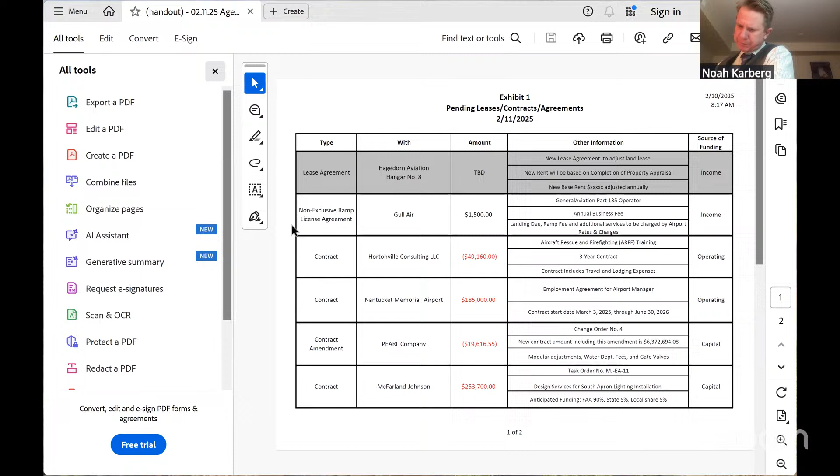I have change order number 4 with Pearl Construction for $19,616.55. There are 3 individual items on this change order. The first, $10,000, is the cost for the domestic fire and water suppression service connections for the dormitory building. It was a cost we had planned to pay directly to the water company via line item transfer. The contractor just went ahead and took care of this for us and is assessing it back to us as a pass-through cost. It's not marked up. So that's a $10,000 cost to them instead of from us to the water company.

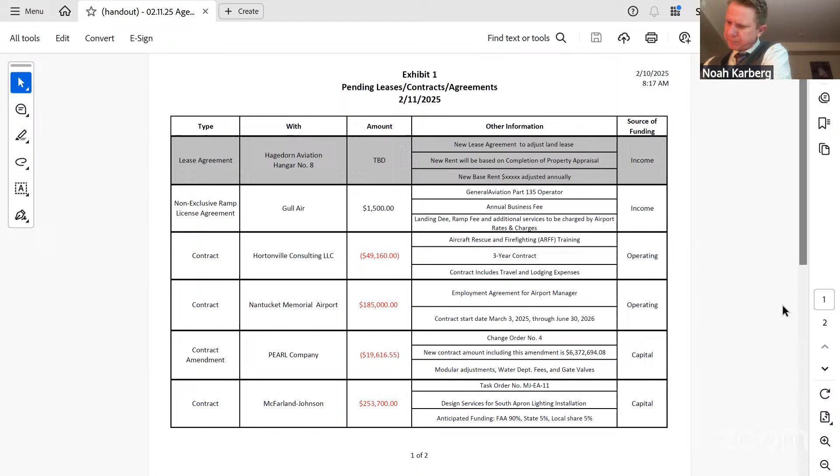Then $3,627.35 is to add future gate valves for any further development of the site, such as the future townhouse. It's well worth that to do that work now, in my opinion. And it was not in our original scope. And then the remaining amount is $5,989.20, and that's for adjustments we elected to the modular house. It's an increase in price for plumbing fixtures and additional electrical outlets.

I have 2 change orders, one with Industrial Protection Systems and one with Oshkosh. They're both related to the ARFF truck, but they're in 2 separate contracts because they're in 2 separate grants. The first, change order 1, IPS, is a credit of $1,469.25. It's due to the deletion of a ladder that was to be supplied, and it's a calendar day extension. The industry is just backed up in providing vehicles and equipment, so it's an inconsequential delay to us.

And then the second change order is for Oshkosh, a cost of $26,873. This cost includes the onboard foam proportioning system. It was not originally scoped with the truck when we first developed our scope. It was before the fluorine-free foams had passed mil spec. Subsequently, we elected to have the onboard foam proportioning system, and it has also become FAA eligible. So that will be available with typical AIP splits.

There's also an additional calendar day adjustment. Again, Oshkosh is doing a great job for us, but there was some delay in the line and with the contract. And then the final item is I have a task order with McFarland Johnson for ramp lighting for $253,700. Again, this is AIP eligible.

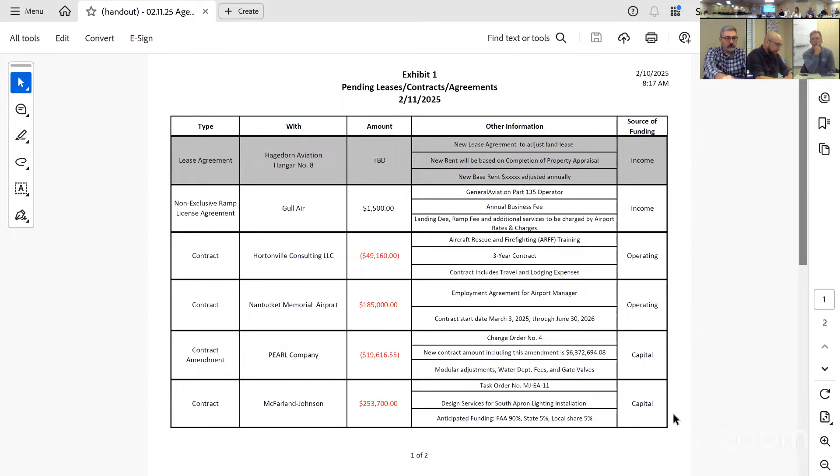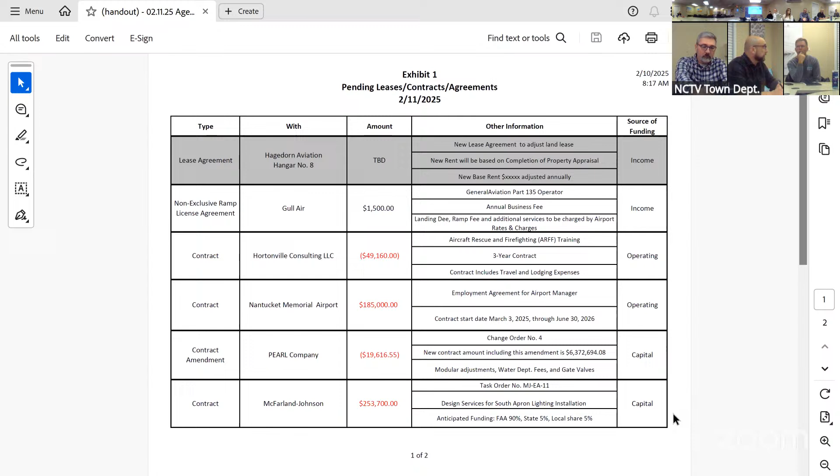Does anyone have any questions on any of those contracts? Is there a motion to approve the contracts and contract amendments just reviewed by Manager Karberg? So moved. Second? Second. Ms. Topham, how do you vote? Aye. Mr. Viscarin? Aye. Mr. Marks? Aye. And Chair votes aye.

And then that will bring us on to the contract with Warren Smith for the employment agreement for the position of the new airport manager. We've worked through this for quite some time. Are there any questions, comments, or concerns with executing the contract? No. Is there a motion? So moved. Second. Ms. Topham, how do you vote? Aye. Mr. Viscarin? Aye. Mr. Marks? Aye. Chair votes aye.

And that will bring us on to pending matters. South Ramp Apron Ramp Expansion Project update, Mr. Karberg. Okay, thank you, Mr. Chair. I have a few items for your review. The noise monitoring systems have been partially integrated. We found that we had bad power supplies on both units, and that is getting resolved, but the items do work. The software does integrate. The contractor and the provider will be providing the updated power supplies, and we will get this piece finalized. We're happy to have that problem identified.

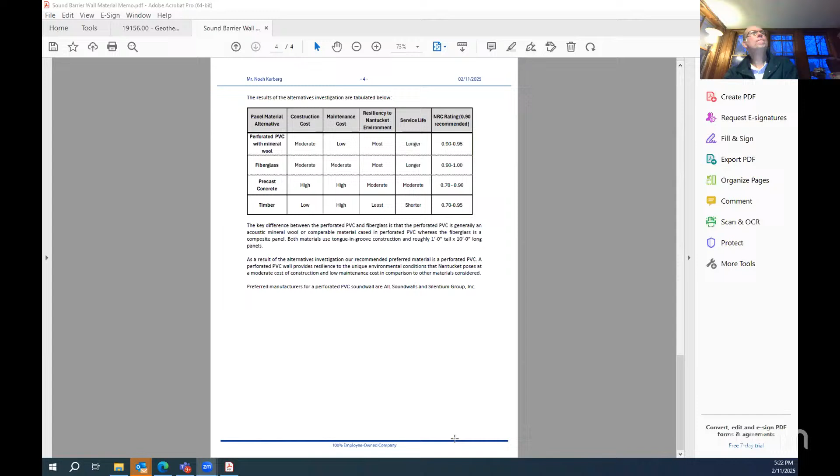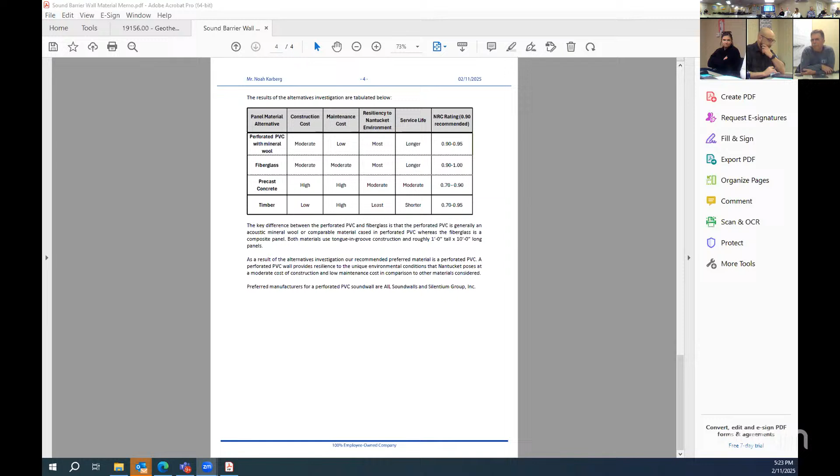Questions? Do we have any examples of where the perforated PVC with the mineral wool in it has been installed, and what's the longevity? I feel PVC, in my experience, tends to be destroyed in fairly short order. Just curious what they've done.

Yes, there actually is a PVC wall installed on I-90 in the Worcester area. I can find out better statistics for you, but yes, there is one in the area.

And what is the expected longevity of this product? Most of the manufacturers will tell you they have a service life of up to 40 years in their published literature.

And will they be able to use the 45-degree or some angled return along the top of this wall? Yes, we did confirm that they do that. And I just looked at their literature and saw that they claim to be able to do the walls up to 30 feet high, so we're not going that high. It seems like the product itself, through the manufacturer's information, is fairly impressive.

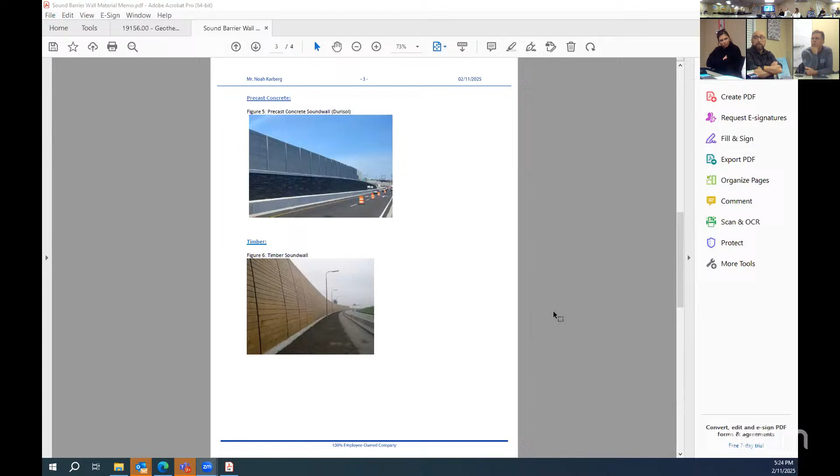And I'll just say that when we started this, this isn't the product I had first come up with, just searching, not with any technical review. But I'm happy to see us going in the direction of a modular type system as opposed to trying to create a precast 20-foot wall. I think this is a better approach for the Nantucket logistics, and I think we'll end up with a more aesthetic and better functioning product.

Now, I think the hardest part is they claim the load rating, and we'll see how it really performs over time with our environment, wind, and the challenges we have. But I'd like to see us proceed with the recommended product. I don't know how everybody else feels. Yeah, I would agree with you.

Lasden, do you need anything further to continue on with this? No, we're good. Thank you.

I think we would be interested, now that you have a direction on this, once you are able to get some numbers. Understanding they'll still be rough until it actually goes out to bid or however we proceed, but to start to get us somewhere in the ballpark of what we might be looking at for this would be helpful. Absolutely. Thank you.

Mr. Chair, may I raise just one question for Mr. Laston? With this type of material for the wall, does that have any impacts on the foundations and bases, or are those still deep pier concrete? There's still going to be a need to hold itself up against the wind, so it's still going to be some kind of drilled shaft foundation or a caisson. Okay, thank you.

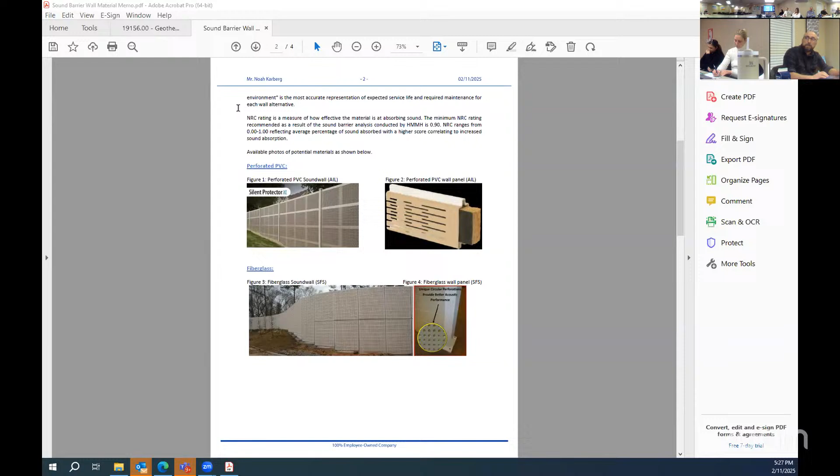There's nothing further. Back to you, Mr. Coburg. Right, thank you, Mr. Chair. For the purpose of the next item, which is the PFAS investigation update, I'd like to defer to Cameron Wood, Environmental Coordinator, for her update and to introduce the consultant presentation.

Hi everyone. Not too many updates today for PFAS. I did want to share that since the last airport commission meeting, we released to the public that we would be transitioning away from AFFF and moving to a fluorine-free solution in all of our ARF vehicles. We also shared that we would be receiving the new ARF vehicle, which we did, and that is already being fitted to take the F3. It has never seen AFFF, so we're very excited about that element of moving forward with our transition plan.

We also shared within that press release that there would be an IFB for transitioning the two trucks that need to go off island for that, and that IFB is scheduled at this point for February 26th to open. Beyond that, I did want to introduce Jim Soukup, our LSP from Weston Solutions, who is here to present to the commission.

Welcome, Mr. Soukup. Thank you. I'm going to share my screen, or attempt to share my screen. All right, did that work? Yes, excellent. Had more luck than Rich. Well, I'm not bragging, I got lucky.

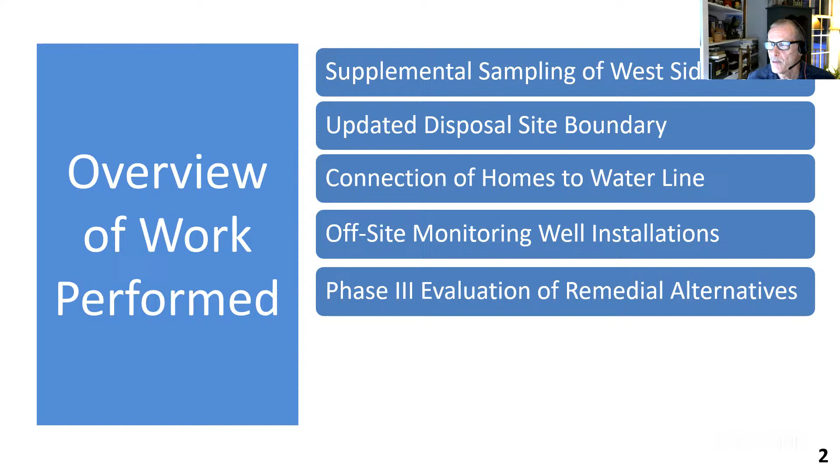So let's jump into the supplemental sampling.

You may recall that we submitted our phase 2 investigation report in March of last year, almost a year ago now. Shortly after we submitted that report, EPA came out with new MCLs for PFAS in May, and those values were significantly lower than the Mass DEP values we had been using. After meeting with Mass DEP and discussing that with them, they indicated their intention was to adopt these lower levels at some point in the future, and they recommended that we be proactive and look at the existing data to compare it to the lower EPA levels to see what kind of impact that might have.

So we did that. We issued a phase 2 addendum, where we basically assessed the impact of the EPA MCLs based on existing data that we already had from the west side, and that data was several years old, back when we first started our PFAS investigation.

As a result of that, we ended up expanding the disposal site boundary to the west as part of the phase 2 addendum, and we recommended that additional homes be sampled on the west side, which I went through at the October 8th meeting.

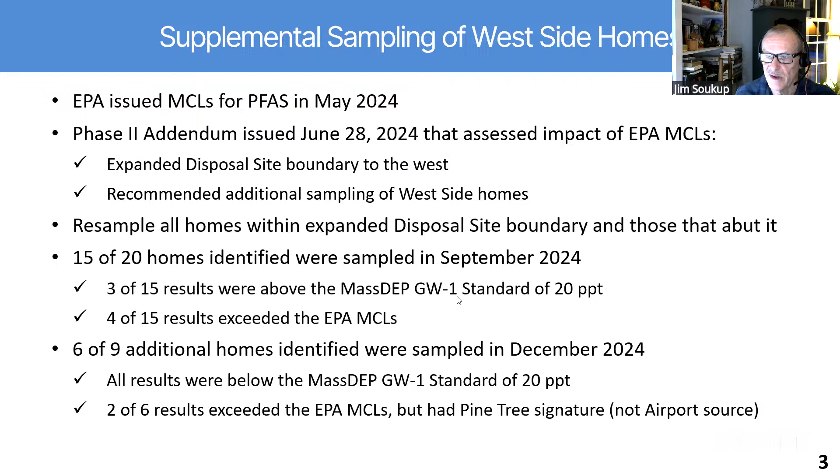So with that, let's go to the map - I think this will make a little bit more sense. We'll walk you through here. The red line is the original disposal site boundary, from the phase two. It's basically the airport property line, the fence line.

Based on the EPA MCL that was lowered and our conversations with Mass DEP, they said we really need to consider the EPA MCL. We also had further understanding that the airport gas property needed to be included in our disposal site - they basically told us that in no uncertain terms, because the airport owns that property.

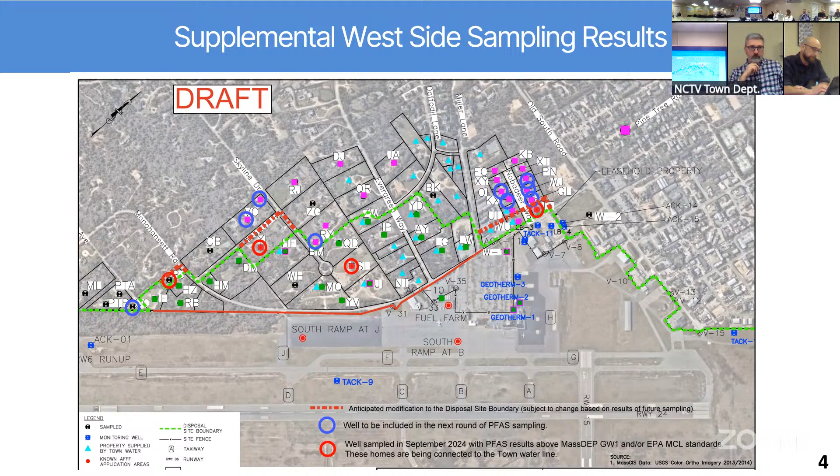I understand that. I'm just trying to understand what's proposed steps from here for additional sampling. Yeah, we're actually not proposing any further sampling at this time on the west side. Thank you. I'm good if you want to keep going. Okay.

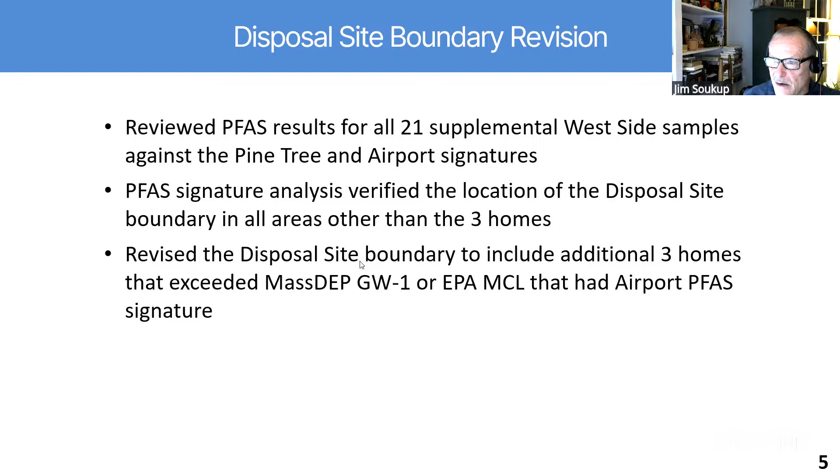So this is, like I said, the disposal site boundary. We revisited that and revised that based on the results from these last 2 rounds of sampling, the September and the December rounds of sampling. And again, it was based on the PFAS signature, which verified the disposal site. And it includes the 3 homes.

So this is basically the same figure we just looked at without the blue dots on it, showing the 3 areas where we're going to expand the disposal site boundary, and that'll be done in this IRA status report that we're preparing now. That's when we'll formally submit that to Mass DEP.

That we're going to be expanding that, and then we'll need to send letters to those 3 residents, or actually it's 4. I think there's 2 on Nobadeer here. This home is already connected to town water, but they are now within the disposal site, so we'll have to notify them.

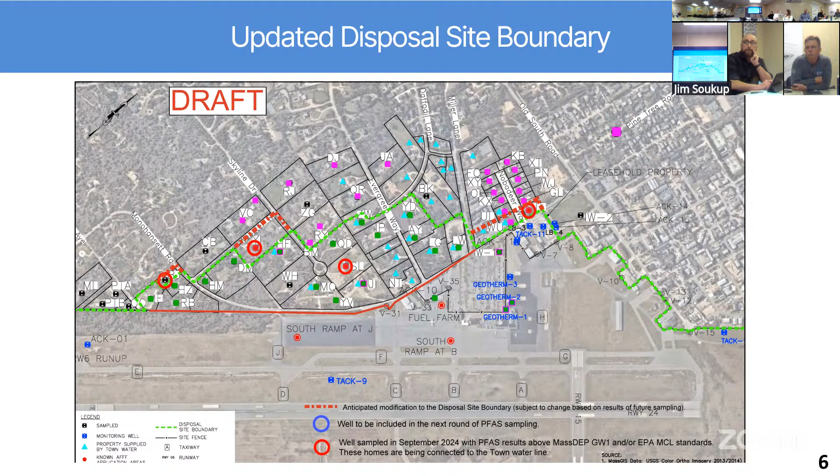Okay. Question? Okay. I think that's my question. Yeah, well, sorry, go ahead. PFAS now, or? No, I think we're gonna keep going. Yep, we're gonna talk about the monitoring wells. What did you want to, before we get to that? Okay. Go ahead, Mr. Soukup.

Okay. So as a result of the sampling, we're basically connecting all those homes up to the water line. So just to summarize, we've offered connection to all homes that are within the disposal site boundary that had any detection of PFAS. So if you were in our disposal site boundary, inside that green and red line expanded, and you had any detection of PFAS, even if it was below the EPA standard, we offered to connect you up.

And that basically included 4 homes on MVR that qualified. They've all agreed to be connected. There is 1 home on MVR that's still not going to be connected to the water line because they've consistently been non-detect. So after, I don't know, probably 20 rounds of sampling, it's consistently non-detect. So that's the only home on MVR that's not going to be hooked up.

And those homes are in various stages of being connected. I think we had reached out. I don't think they're all quite connected yet. We reached out this fall, and some of those homes had already been winterized. So I think they're teed up. MJ's got them teed up to be connected in the spring.

And then there are 13 homes on the west side, based on that disposal site boundary. And again, they're in various stages of being connected. MJ's doing a great job. Rob over there is working with the residents and working with the contractors to get that all lined up and get that expedited.

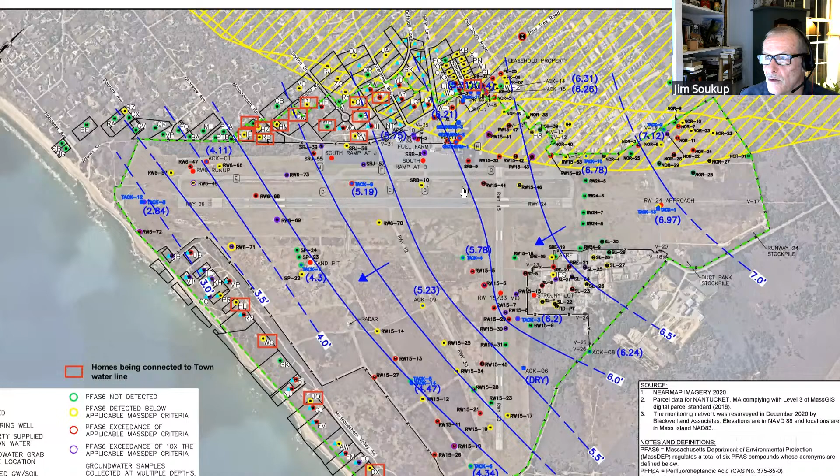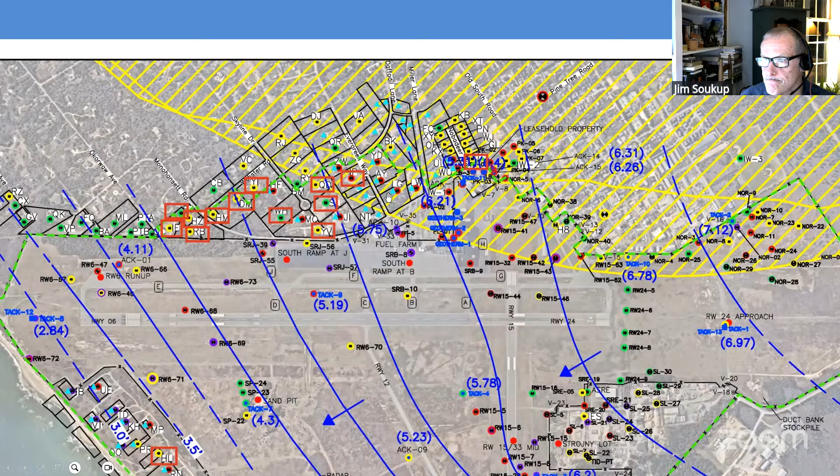So let me zoom in a little bit. Here we go. So these are the homes on the west side that are being connected, and you can see they're the ones that are inside. I know it's busy, a lot going on in this figure, but this is the green line here, showing the expanded disposal site boundaries. These homes are all inside. These homes that you see here are the ones where we're expanding the disposal site boundary around those now, and then the one up here on Nobadeer. So those are the homes that are being connected. Oops. I'm not sure why I did that.

Offsite monitoring wells. So as part of the phase 2 addendum, we included a recommendation to install monitoring wells in a residential area to the west. We want to confirm groundwater flow patterns in this area and get groundwater elevation and groundwater quality data from those wells. When we looked at the area to the west, we discovered that many of the roads in this area are privately owned, which presents a lot of difficulties in trying to get access agreements to put in monitoring wells. So we worked with the town to identify locations where we could install the wells along town roads, and that helped avoid the access issues.

We installed 8 monitoring wells in mid-December. I've got a map I'm going to show you in a second, but one of the 8 wells we actually drilled on airport property. We were going to put it on Monohansett, and it was right outside the fence. The town is planning some upgrades and work on Monohansett, so they're going to be tearing that up.

So we felt it was safer to put that well just inside the fence. It's only a few feet from where we had wanted to put it, and that way it's protected and it's on the airport property. So we've got a synoptic round. The wells are in now. They've been developed. They're ready to go.

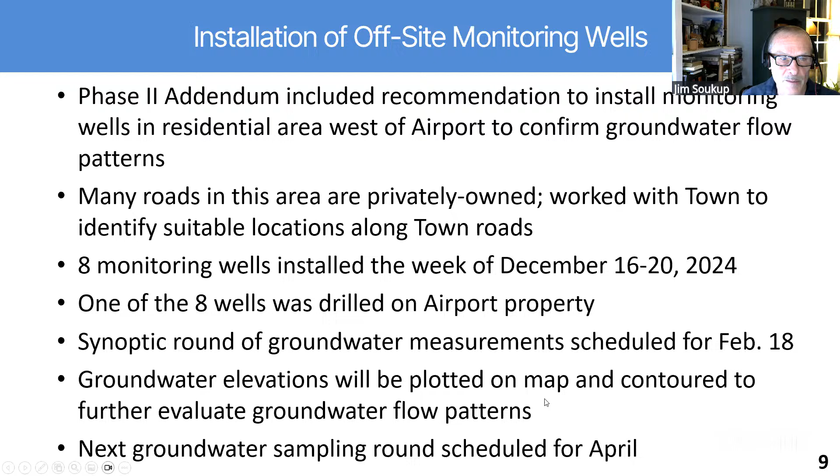Once we get our groundwater measurements, we'll take those groundwater elevations, plot them on a map, contour them, and then look at what that tells us as far as evaluating the groundwater flow patterns to the west side. And then we're planning on sampling those wells as part of our spring round in April, when we'll do a site-wide sampling round of all the monitoring wells on the airport at the same time.

So this is an overview map that shows the locations of the 8 monitoring wells. This is the one that we put, like I said, on the airport property. So they're scattered around. Ideally, we would have liked to have had some wells in this area, more in the middle. I had more here, but again, these roads are all privately owned, so we had to push them out to the west or to the east onto a town-owned road. So that's the location of those.

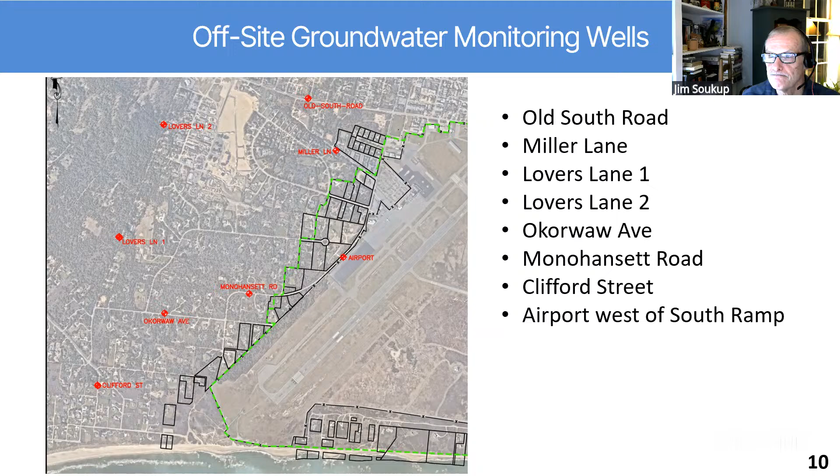That brings us down to the phase 3. Like I said, this is where a large majority of our efforts have been focused over the last few months. A phase 3 is basically an evaluation of remedial alternatives. We've spent the last 3 or 4 years investigating the property, understanding the extent of the groundwater and soil contamination. We've got that figured out for the most part.

Now it's time to evaluate, okay, what are we going to do about this? What remedies are applicable that we need to consider? That report is due to Mass DEP by March 3rd, so a little less than a month now. Our phase 3 did take into consideration the fact that we've connected residents with PFAS detections to the existing water line.

So we've mitigated the immediate risk, the current risk, right? People drinking the water. As soon as we found out somebody was drinking water, we got them on bottled water. We got them on POETs. Eventually, we got them hooked up to the water line. So we've mitigated the current risk. So really what we're doing with these remedial alternatives is addressing future risk, long-term risks associated with the site.

And those are basically two. The restoration of groundwater within the zone 2, and the zone 2, you'll recall, is that area at the northwest corner of the airport that's within the wellhead protection zone for the Wannacomet wells. Groundwater within that zone has the potential, theoretically, to get drawn into the Wannacomet wells as a long-term risk. So that's why we're focused on restoration of that groundwater.

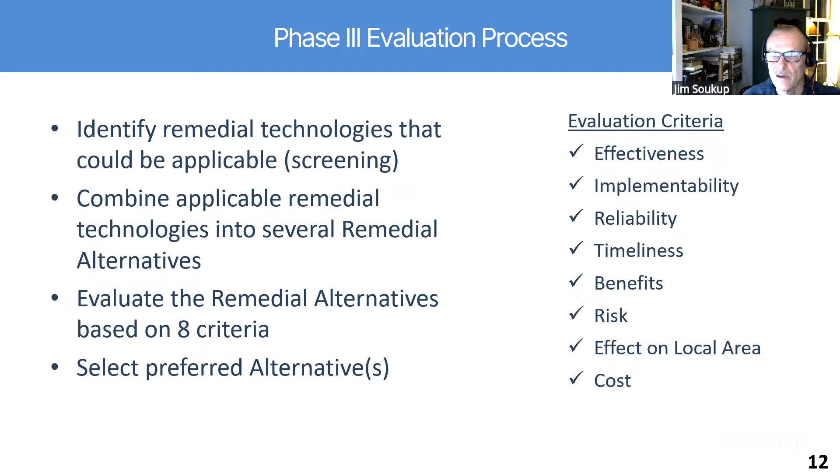So we divided the alternatives up into soil and groundwater. So the soil alternatives that we're looking at right now are no action, and no action you always include in these evaluations as a baseline for comparison of the other options. So it's not that we would do no action. We're not going to walk away from this. We're not going to do nothing, but we include it as a line item for comparison.

Natural attenuation. So this would be basically natural flushing of the PFAS from the soil via rainfall over time. So if you just allowed that rainfall to continue to fall, you're not flowing any more AFFF. There's a finite amount of material there. Eventually, it'll flush itself out, wash itself out, down to the groundwater, and then flow off to the ocean over time.

So we're looking at that. Obviously, the downside to that is it's going to take a long time, right? It's not going to happen overnight. We've got a very thick unsaturated zone there. I think it's like 30 to 40 feet. So that's a lot of distance that the PFAS would need to be flushed out of that zone. That would take a while.

Capping is another alternative that we're looking at, and there's different ways to do that. It could be concrete. It could be asphalt. It could be an engineered vegetated cap. So you'd have like an HDPE liner, with topsoil over it, and vegetate it.

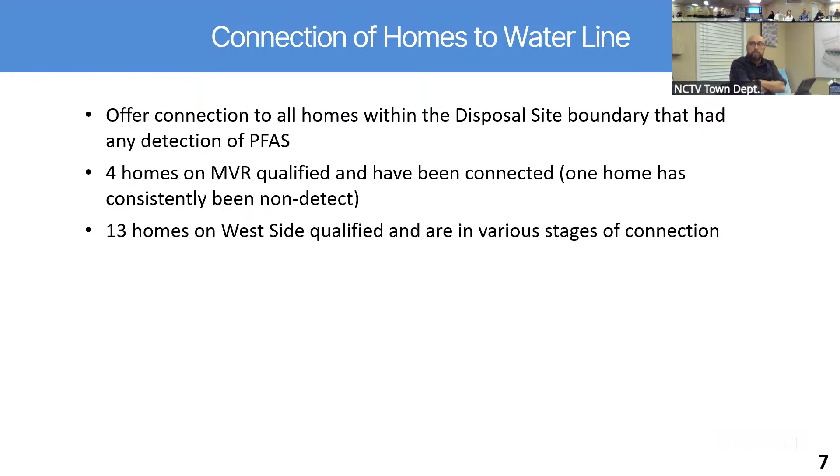My other question is, I understand including no action among most alternative analyses, but it seems equivalent to natural attenuation in this case. Natural attenuation is essentially taking no action. So why wouldn't you combine those two line items? Unless I'm missing something, what's the difference between no action and natural attenuation?

Yeah, and you're right, they are very similar. The difference is that natural attenuation would be monitored — we'd go out and sample, say once a year or once every 2 years. Fair enough, so there's a cost associated with that. It's really technically monitored natural attenuation, which is generally what you talk about with groundwater. That's the cost component to it.

Thank you, yeah, that's the active component, if you will. Yep.

Okay, and you're scheduled to have this alternatives analysis completed — I believe next week is when the draft report is due. I'm reviewing the draft text this week, so I believe it's scheduled to go out to the airport for review next week. Okay, great, thank you.

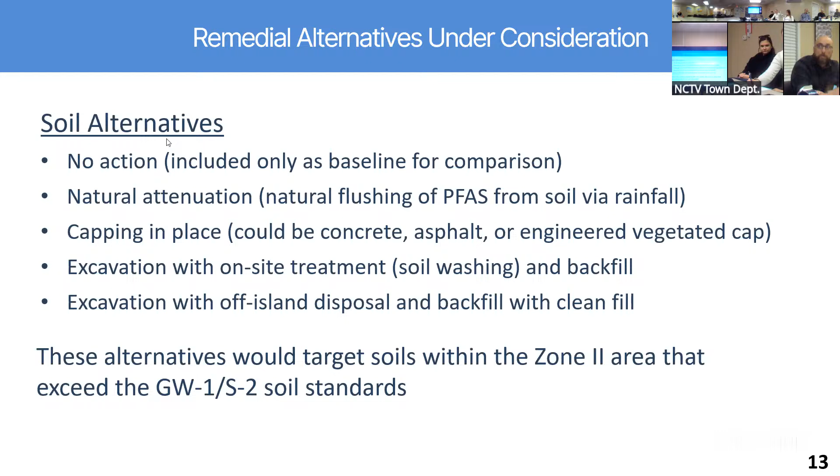Anybody else on soils? So I guess we're on to groundwater remediation. Yes, groundwater alternatives.

So for groundwater, similar — no action is the first one. Again, monitored natural attenuation, this time we added the word monitored. And again, it's the natural flushing over time of PFAS. Now for groundwater, it's actually a much faster process because the groundwater flow rates at the site are pretty quick.

It's on the order of 700 feet, 600 to 700 feet per year that the groundwater moves, so it moves very quickly. The groundwater will flush itself out much more quickly than the soil. But you've got that overlying soil, which will continue, as rainfall falls on the site, to flush into the groundwater, which will kind of maintain the groundwater concentration.

That's why the overall remedy for the site will be a combination of a soil remedy and a groundwater remedy, but you have to take that into consideration. So it may be that we're more aggressive on the soil side and remedy the soil, but then rely on natural flushing for the groundwater, just based on the higher flow rates there.

One of the things we would do in the next phase, phase 4, is probably do some leaching tests of the unsaturated soil and find out what the leaching rates are. That will give us a better idea to lock in what the time frame would be for the soil.

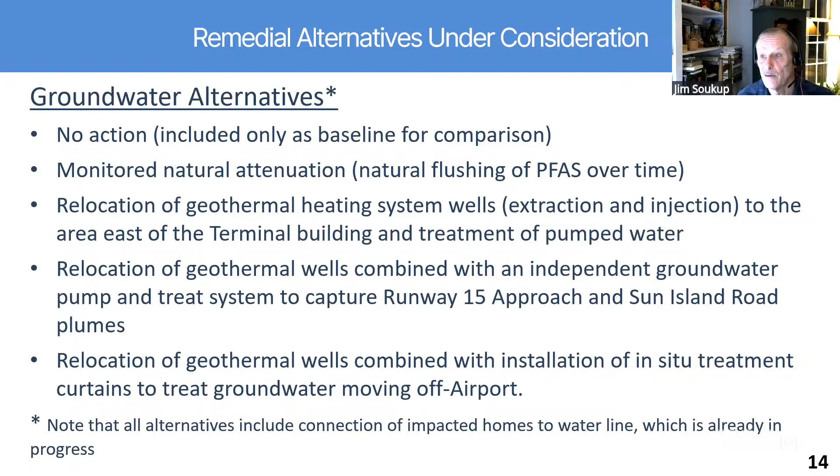Because technically this area, along outside the airport fence on MVR, is outside the non-potential drinking water source area. So that's actually a GW1 area as well. Well, could you explain why we would have to do it down there, Mr. Soukup, if it's not zone 2 and they're connected, to mitigate the risk?

Why would the groundwater need to be treated on the south side? Well, that's exactly what we would rely on. I mean, because we've mitigated the short-term risk by connecting everybody up to town water, but theoretically that groundwater still needs to be cleaned up to drinking water standards, because it's outside the non-potential drinking water source area, and it's a sole source aquifer on an island. So technically, that has to be cleaned up to drinking water standards eventually.

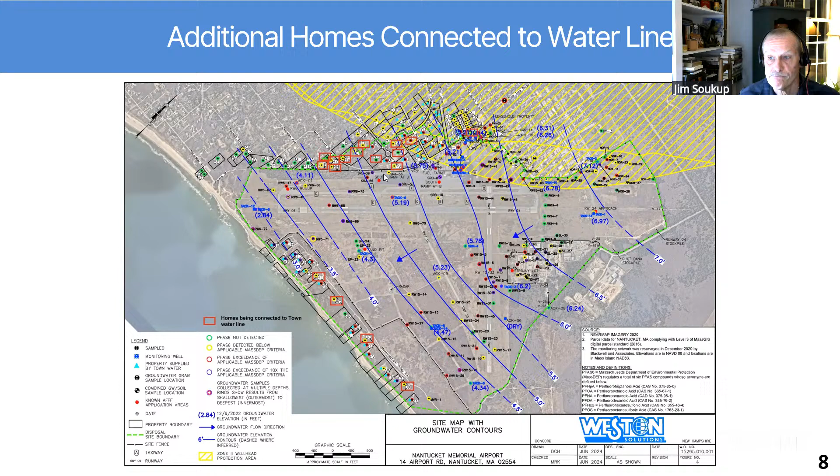Yeah. Oh, thank you. Too many holes with it. Oops, went the wrong way again. Yeah, please, and I'm sorry, go ahead.

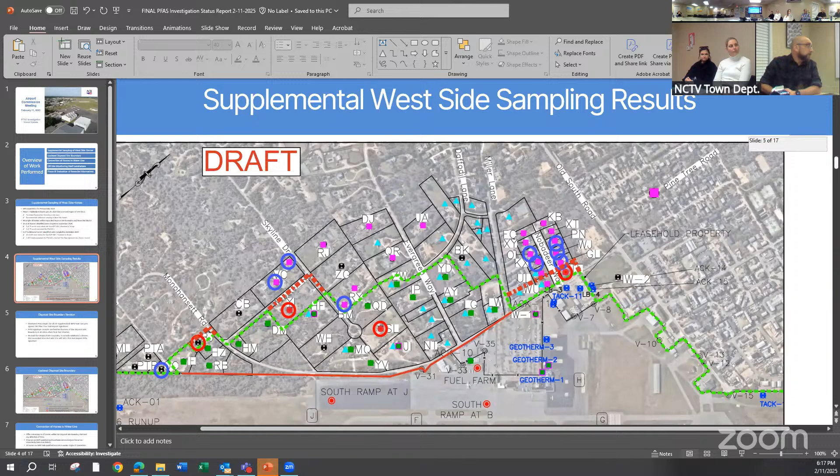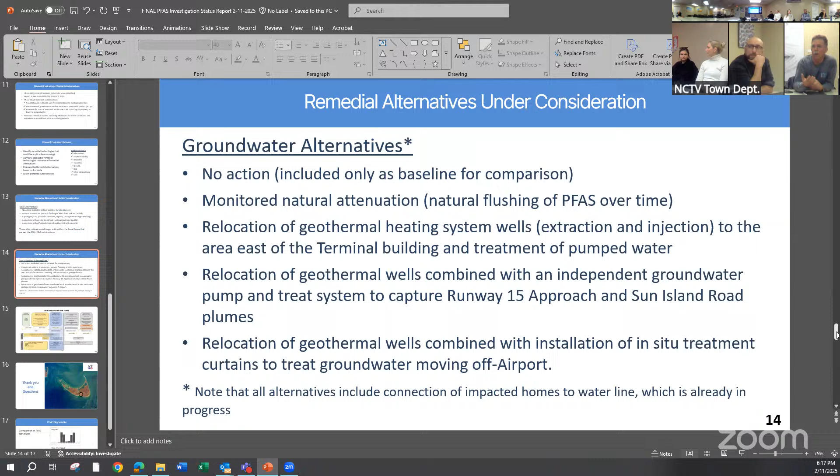I just wanted to talk a little bit about the water flow and the geothermal system. It feels like if you are drawing down and cleaning the water up by the Fed, up in that area at the end of runway 15, doesn't that actually arrest the flow towards the town wells? And combine that with the actual flow of water going south directly away from there - on top of that, as you said, it's 700 feet a year. I'm just kind of curious, if we did nothing, do you have a sense how long does it take for all that?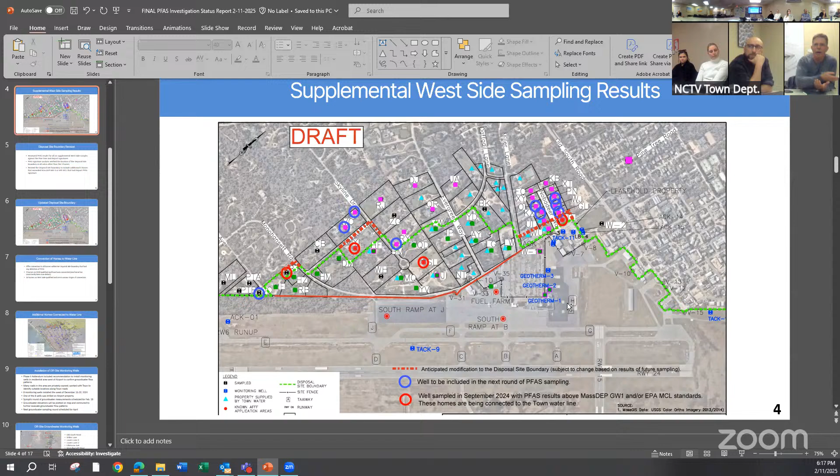Because it's not like one pass through the water and all the PFAS is gone, right? It must have a half-life, right? Like the first pass you might get half of it, second one you're going to get 25%, and so on - it's a diminishing return, if I'm not mistaken. So is it 100 years before that would all be clean?

I'm just asking roughly. And then I know I keep going back to the geothermal - I think it has a lot of benefits to us to utilize that in what I'm seeing in the groundwater stuff you're talking about, to help facilitate cleaning up this water, and it draws in a negative area up in there where it's the highest, to keep that water from migrating towards the recharge zone.

Yeah, no, exactly, a lot of really good points in there. So to start with your original question, you're exactly right in how you described it as far as a half-life - it's more than just one flushing. It's not just, all water comes in, it's clean, and cleans everything and flushes everything right out. You're right, it's because it's absorbed to the soil too - it has to kind of get flushed off the soil. So, again...

PFAS is a new contaminant, right? So people are just starting to monitor these sites. We're just learning what that half-life is. There's more and more studies being published to get a better idea and a better handle on how long that's going to take.

The bigger question for us is the soil, because we've got 30 to 40 feet of unsaturated material here. So this stuff has to get flushed down through a very thick column, 30 to 40 feet of soil, before it even hits the water table. And then once it hits the water table, it'll race off to the south. But it's like a sponge - that steady, slow drip out of the soil is what's going to drive the length of time this is going to take. And you're right.

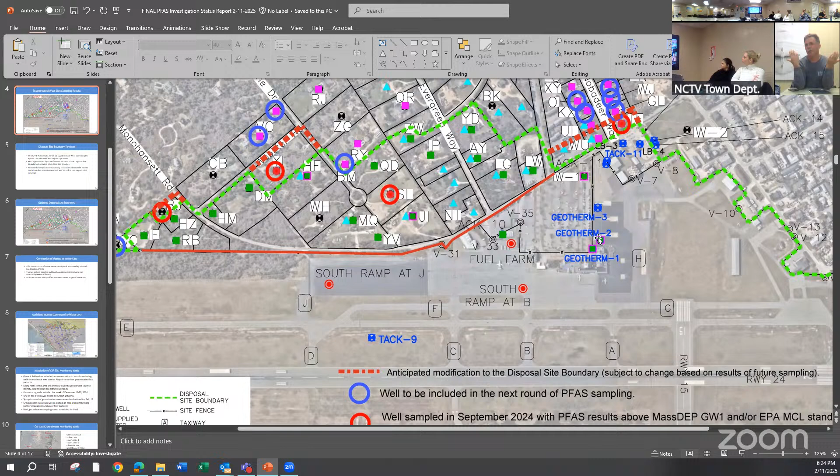Yeah, I'd worry about that. We could model it, we could look at that option. But what I'd worry about is that if you start pumping here, you might draw this contamination in, because you're going to pull from all directions. So yeah, you'd be pulling this stuff back, but you'd also be pulling this stuff over, and we don't want to do that. But we're also pulling it away from the main aquifer, which is our real goal - to protect it until we can get it cleaned up.

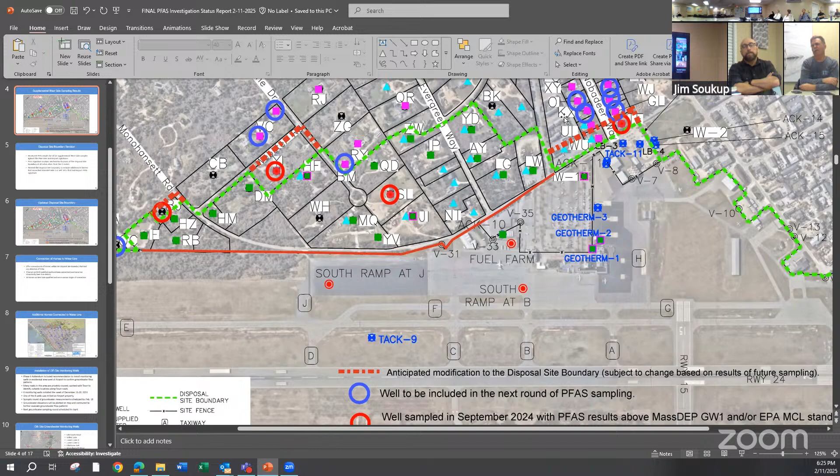Because the main aquifer is further to the west, right, and to the north, right? Well, the aquifer is everywhere. It's everywhere under the island. I think the zone two is up in this area. Right. Yeah, go ahead.

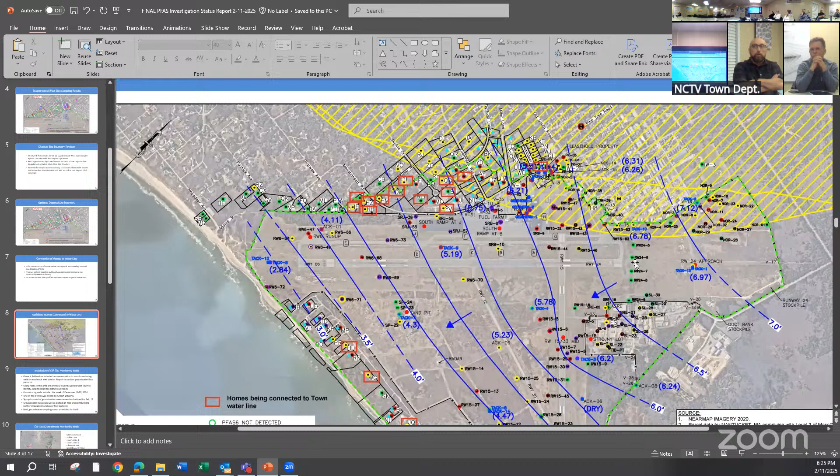Perhaps one of the alternatives, and you're the expert in this, but we're trying to look at it as well, and there's also considerations for the airport. Why wouldn't one of the alternatives being studied be to use the wells that exist? At least in perhaps an initial phase, and some of the options that Commissioner Marks just described, and/or I could see a hybrid approach where you abandon the discharge by the exit, you maintain the 3 source wells, and then you pump towards the middle

of the field. And I think it would save significant infrastructure cost in terms of putting all new wells and piping in if we're just south of the area of concern. I think it could probably get started faster. Yeah, it's just an observation that you're moving those wells, putting brand new wells in to go 100 feet or something, right? And the contamination is going in that direction, as you just said.

So is there some benefit to, all the infrastructure is there for those 3 wells, but I fully see your point on the discharge. So you flip the discharge to the middle, maintain those 3. So perhaps that's one of the alternatives that could be looked at. Does that make sense? Yeah, and I love the idea of treating that, which I think has been brought up in the past, and I think it's going to get into our discussion on the next item for the terminal. I just think it's a good way to be doing multiple things with what we have as resources, right?

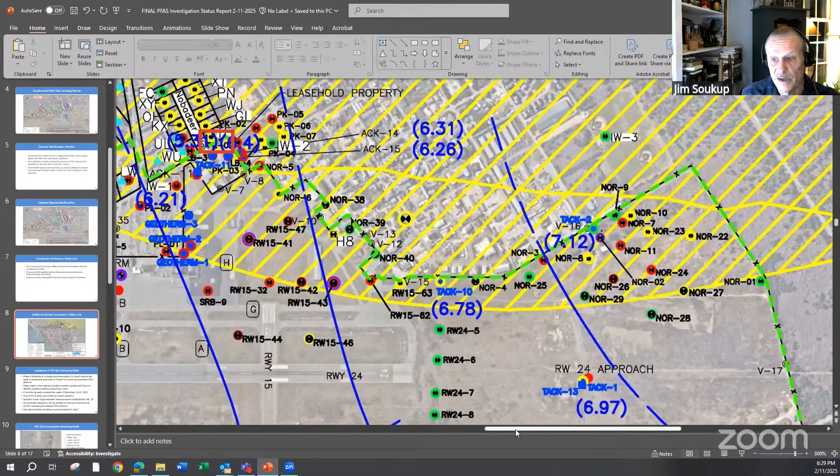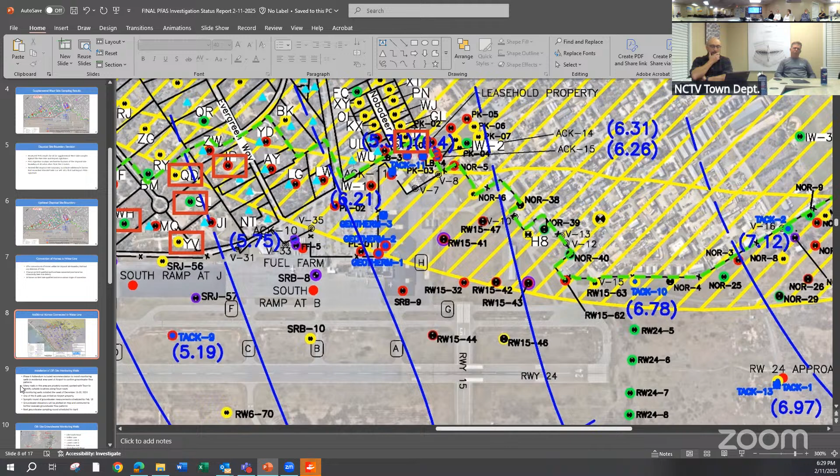Where we would just pump the water out from here, treat it and discharge it, and just not have it involved in any kind of heat exchanger type situation to try and use for heating of the building. That certainly makes it a lot cleaner. But I don't know that it makes it economical, or helps you as far as the HVAC. You're gonna spend all the money on electricity, you're gonna have all the new infrastructure anyway. I think what we're coming to, it sounds like, is that we can meld these things together and do both. So continue to be creative.

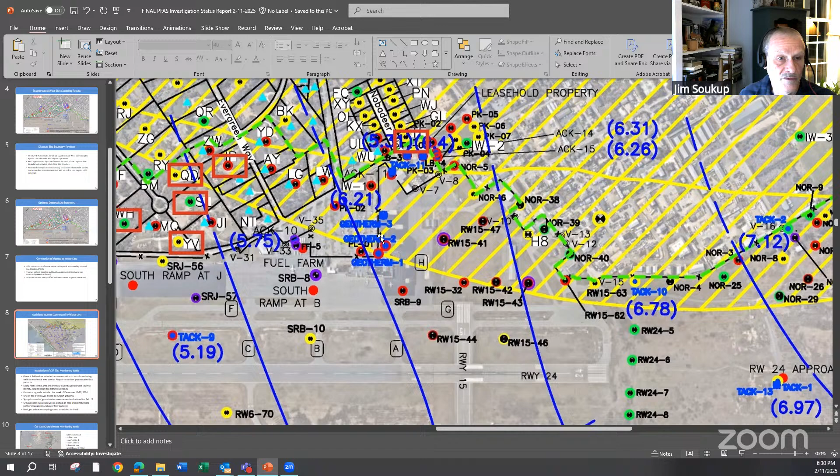Exactly, and that's kind of what we're trying to do with these options, same situation with the soil, where we talked about capping, concrete, asphalt, vegetated cover. If the airport's going to be long-term thinking, we're going to be doing some expansion in this area anyway, how can we dovetail that with future capital projects to get additional benefit. So, I think we need to move on.

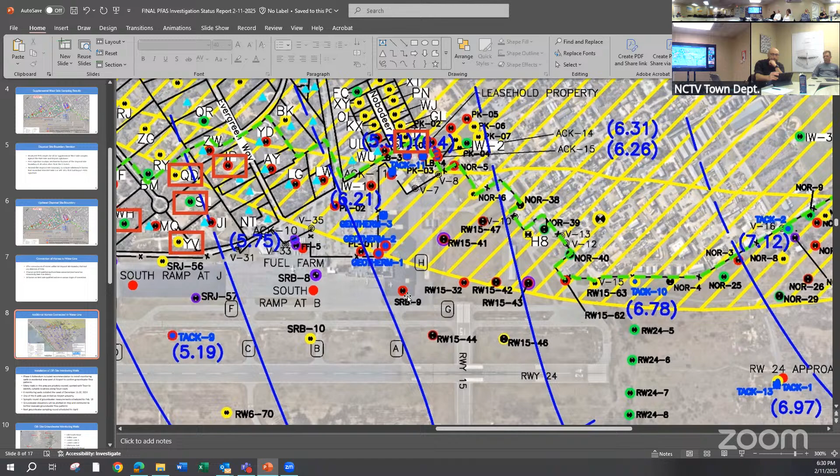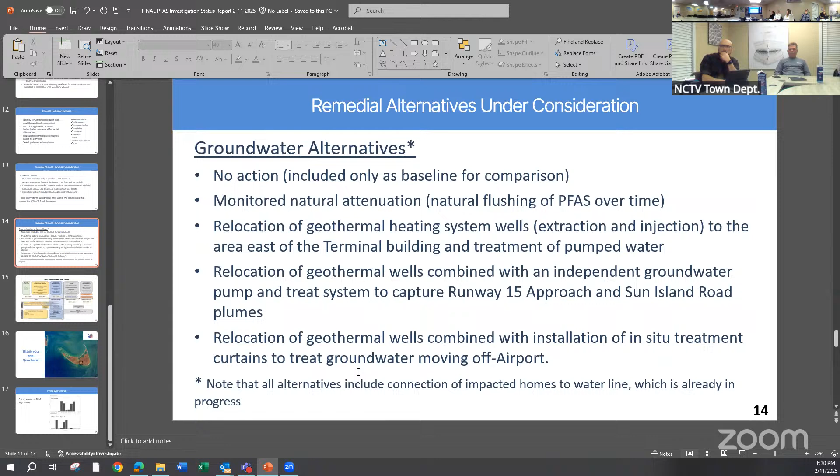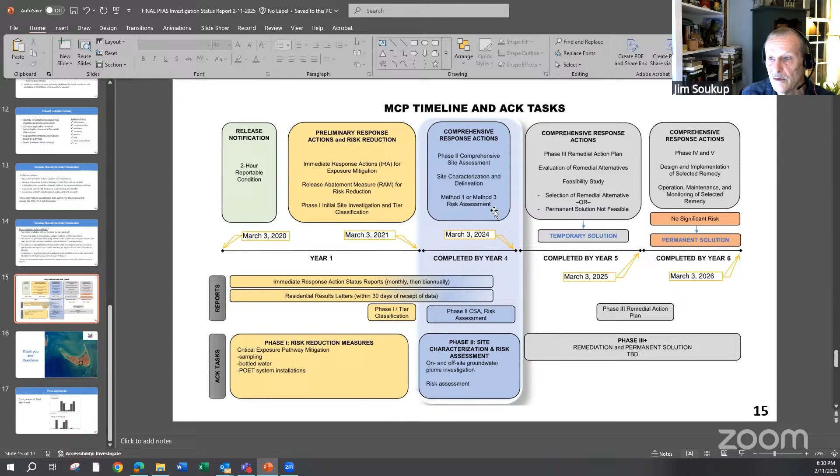Thank you. Is there more, or are we all the way to the next steps? I don't think so. I think that was it. Yeah, we talked about that. Just the overall time frame, which we always have. The phase 3 is, like I said, due in March, and then we've got a year to do the phase 4. So that's it. Okay, so for our March meeting we should expect the report.

Is there a difference between the IRA report and the phase 3 alternatives? So you're preparing 2 reports? Correct. And we would have both of those presumably for our March meeting, because you'll have filed with the DEP. Yes. Perfect. Thank you. Does anybody else have any questions for Mr. Soukup or Mr. Lasdin? Okay, thank you very much for all the work on this. We appreciate it. No problem.

With that, there is nothing further. Ms. Woods, did you have anything further PFAS related or on the report? I did not. I think that was a very thorough overview. And back to you, Mr. Karberg. Okay, thank you, Mr. Chair. And Mr. Soukup, I would invite you to stay for the item after this, where we are going to discuss the terminal geothermal system in a little bit more detail at the commission's discretion. Oh, excellent. Just have to find out how to stop sharing.

Okay, well, I'll continue. For crew quarters, I toured the site on January 24th with our chairman, the architect, and our OPM, shortly after the boxes had been delivered. I'm happy with progress so far, and I'd invite any other commissioners who would like a tour to reach out to staff. Happy to report that the easement requirement with National Grid is out of the right-of-way group and into scheduling. I don't have an anticipated date, but on-site coordination has begun with National Grid staff, Kobo, and our contractor, which is a good sign.

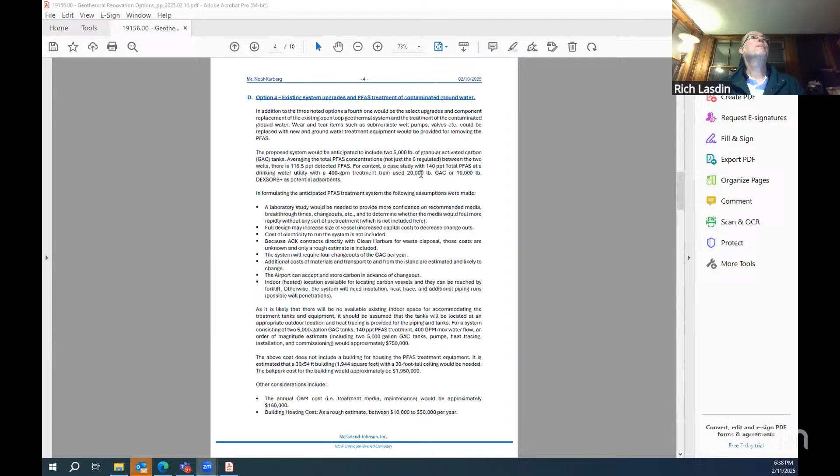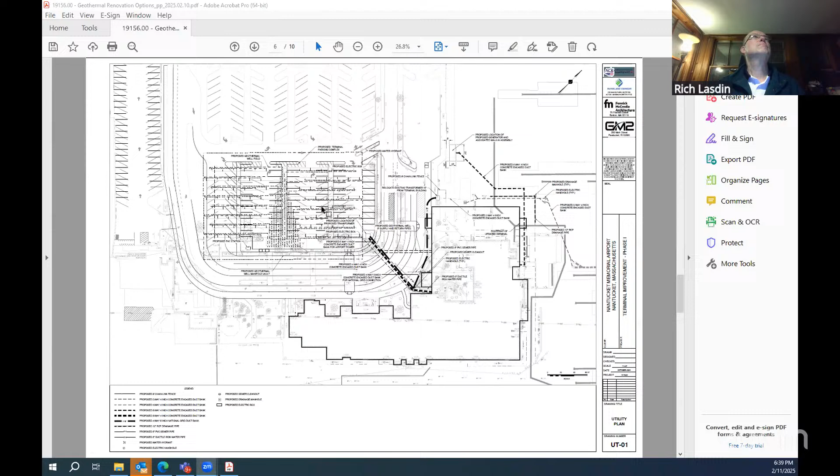So this was the drawing that was in the program document for the terminal. It shows you the well field for the closed loop system. It takes up quite a bit of the parking lot. It's a whole series of shallow wells, and it's based on the volume of heat and cooling that we need and an expected amount you can get out of each well, and it shows the well field that's there. And then some schematics of what that looked like. Again, the well field and how that would all manifold together.

And then we are actually designing a similar geothermal treatment system for another client of ours now, and so we have a drawing of what we did for another client. It just shows you it would need a separate building. I originally thought I could possibly put it in the old vault building. It wouldn't fit. So one of the options is to build a second building to enclose all of the equipment, the treatment vessels, the piping, the manifolds, all the equipment necessary, somewhere at the airport.

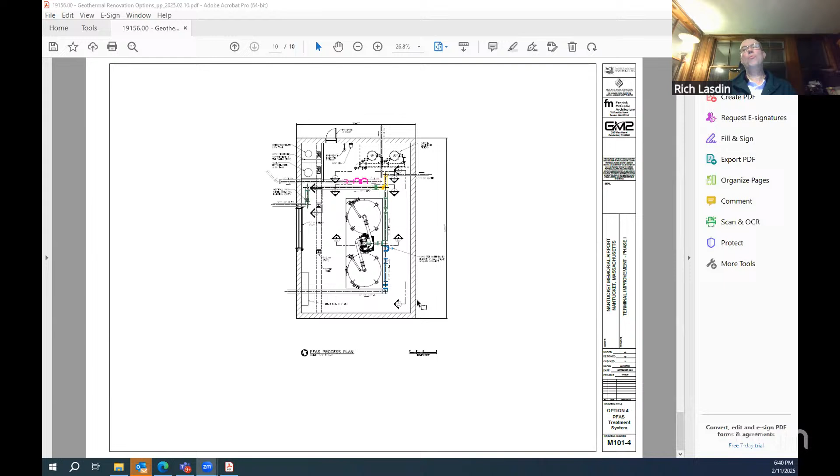So again, very high level. We did not go very deeply into any of these topics. This was just a couple of high level options that can be moved ahead in the next phase of the project. You have a recommendation? The recommendation, if the idea was to not use the existing geothermal system, was option 2.

But, and then, Mr. Soukup, if I could, what is the likelihood that, as part of the work for phase 3 with DEP, some level of groundwater treatment is going to be needed?

Could you say that again? So do you anticipate, and I think I know the answer to this, but I'm just trying to make sure that we understand it, that as you do this alternatives analysis, especially given the zone 2 contamination, that as part of phase 3, DEP will in fact be looking for some level of groundwater treatment? Yeah, right. In the Sun Island and then at a minimum the runway 15 approach.

Yeah, we have to do something up there, something active. So I think that drives this solution. It does. I agree. And combined with everything that we've heard in the piping, you're looking at like 3 million, rough, something like that, and we start treating the water and doing the right thing. Right. And I think that there's a benefit there.

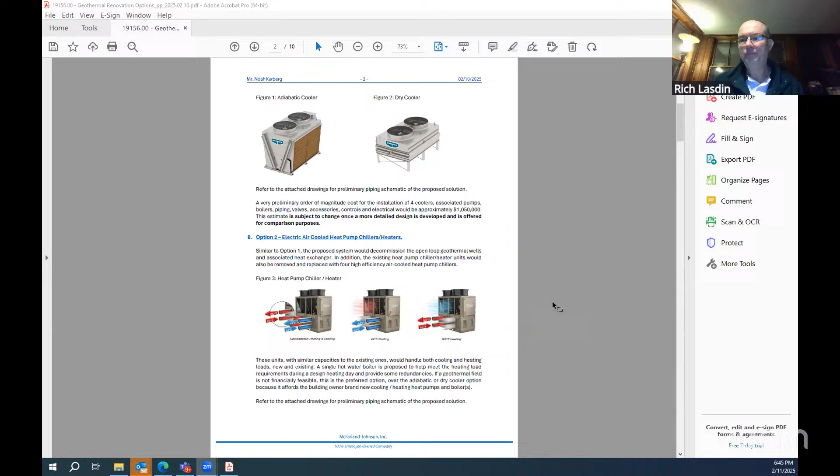Yep. I think the PFAS and the geothermal are tied together, so it makes sense to put our resources there at this point. Right. Plus, we have some talking points with DEP. We have a plan. We're not floundering around looking at four things. We've got maybe one thing. Maybe not a full plan, but there's a direction to try to do this, so thank you all for that.

Anything further on the terminal? No. So with that, I think we're probably okay with Weston and MJ unless, Mr. Karberg, you have any reason that you would hope they would stay on? No, they're welcome to stay, but I think that was great discussion, great direction all the way around. So thank you. We appreciate it. Thank you. Just don't want to keep you just to listen to our other stuff.

With that, we'll move on to review and approval of the employee housing policy.

In your packet, I have a final housing selection policy for your review and proposed approval. The dorm on Nobadeer Farm Road is proceeding, and we're planning on making use of the one-bedroom dorm manager's apartment for full-time employee housing. This isn't a complex document. I haven't over-engineered it, but it gives the necessary guidance to the airport manager on processes they may use to fill the apartment through a defined process of their choosing, including directing the collective bargaining process towards approval if it is a union employee. So with that, I have this policy for your approval, requesting approval, and I would need a vote.

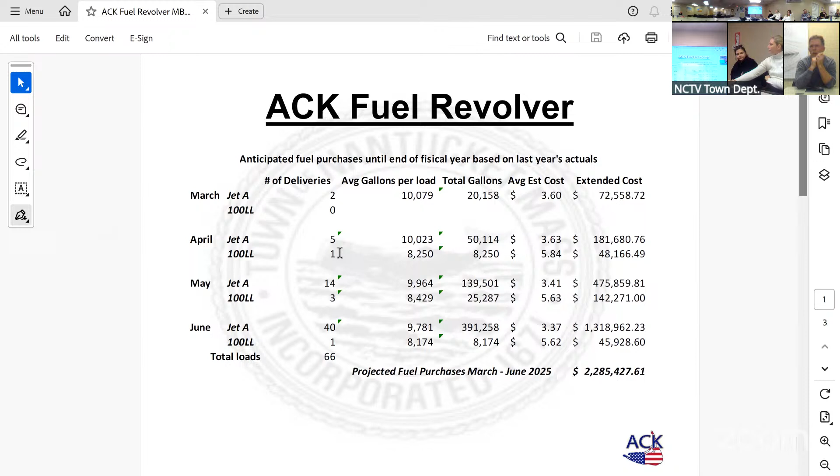I have a quick question. I was just curious, I had to face the possibility of - what do you call it - when they import the duty tax, right? For propane, tariff for propane. It got pushed back 30 days, and I'm curious if any of our fuel could be subjected to any kind of tariff. I didn't know if you'd looked into that at all or even thought about it.

I have not looked into that, and I have not thought about it, and I can't tell you where our jet fuel is refined. I know it goes to the Boston terminal where it comes from, but prior to that, I don't know. Yeah, because a lot of the fuel in the Northeast comes from Canada, so that's why I bring it up. And even some of it comes from overseas on a ship, believe it or not - doesn't need to, but it does.

I was just curious if we could be affected by that too. So, without discussing magnitude, fortunately, in administering the fuel revolver, if we have something that increases our price exposure, it's very easy for us to come back to the commission and raise the fuel revolver cap again. Doing the reverse is actually more problematic - it's harder to lower the fuel revolver cap. So that doesn't scare me as much as a major economic downturn or a major reduction in travel.